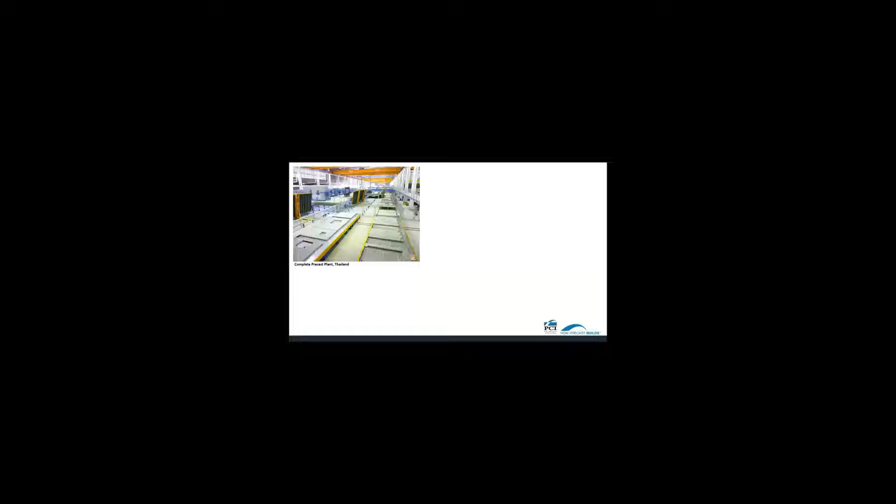Here we see one of our customers, a precast plant in Thailand. They make product for 700 apartments per month and is one of the largest plants in the world. This Hollowcore plant in Belgium is fully automated with very low labor consumption. And here we see a double wall plant in Germany. In addition, we have over 50 plants here in North America.

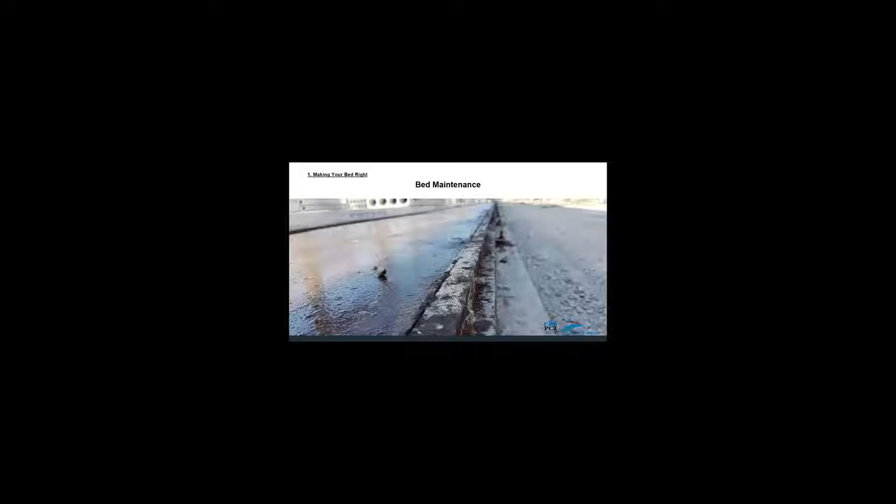As mentioned earlier, bed preparation is a critical step in the production process as it lays the foundation for the rest of the production cycle to continue. But we also need to think not just about the short-term process, but about long-term bed maintenance as well.

Production beds and their components are a valuable asset. Without them, there is no process, and where maintenance lacks, quality suffers, affecting the viability of the production system as a whole. Bed maintenance is therefore a primary consideration to sustaining the production cycle. So where do we start?

Cleaning is the first step, and this can happen immediately after previous production is stripped and loaded out, or sometimes even while it's still going on, depending on the type of product, space available, and scheduling. This can be a fairly labor-intensive operation, as we see here. Crews of 3 to 5 workers, or even more, can be involved on one single bed.

The goal here is to remove all of the remnants of previous production cycle from all of the casting surfaces, including side rails and machine rails. This typically includes fragments of concrete debris, large and small, as well as dust, but may include leftover formwork and other scrap materials as well. Manual scraping, shoveling, sweeping, and vacuuming are standard practice here. It is no secret that this is one of the toughest jobs in the plant.

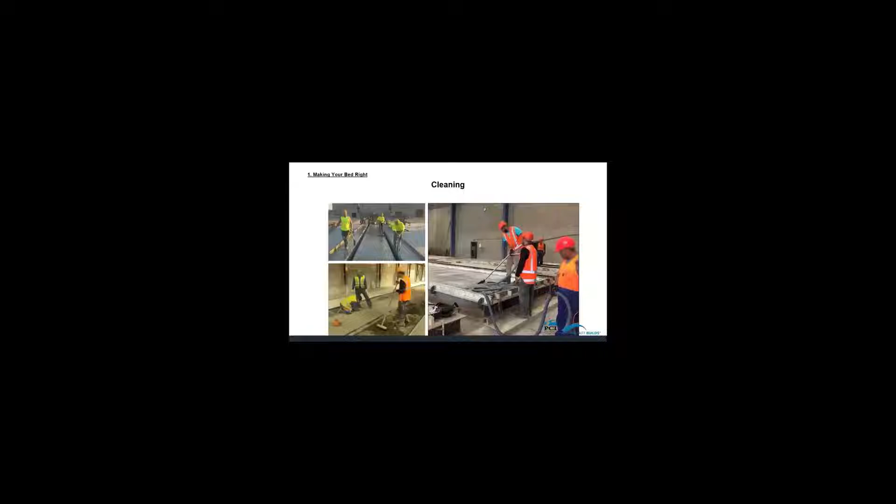Next comes oiling and finally pulling of strand. Once the bed is clean, the crew can begin to apply release agent, commonly referred to as oil, to the surface. This is done using a pressurized spray can or backpack, sometimes followed by floor mops. The key here is to apply a thin, even coat to all casting surfaces.

Too little, and the product may bind in the form, causing damage to the product. Too much, and bug holes and other defects will be visible on the concrete surface. This is a very important job and is usually done by more experienced workers under the watchful eye of the QC manager, of course. The old adage, less is more, certainly applies here.

Pulling the strands then takes place from one abutment to the other. There are a few methods used in the industry depending on the type of product, design of the beds and headers, and whether other reinforcement or headers are in place before strand is pulled.

We won't get into all of the methods, but in general, a team of several workers are usually required to pull the strands off the coils and walk them to the other end of the bed with or without mechanical assistance. This can be quite a tough job with high risk of injury from slipping on the freshly oiled surface.

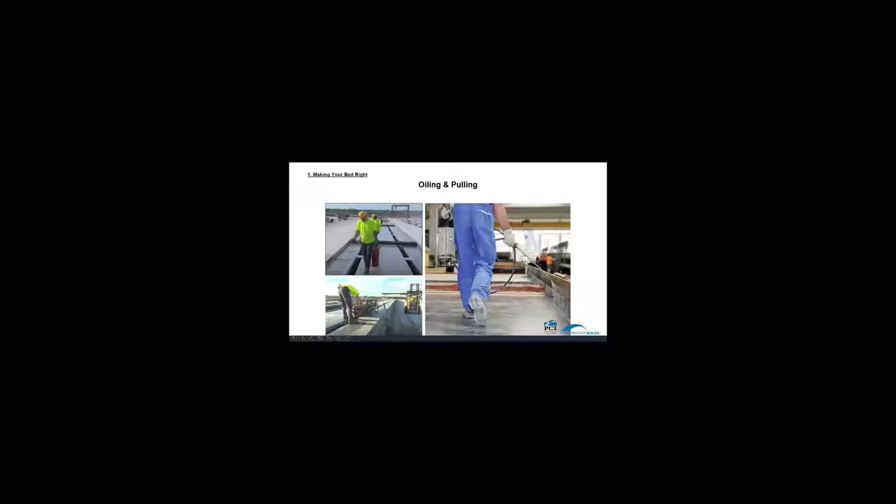I would like to turn your attention for a moment to looking for opportunities for improvement. I am sure that most of you here are familiar with the 8 types of waste commonly affecting production systems, better known as TIM WOODS. They are transportation, inventory, movement, waiting, overproduction, overprocessing, defects, and skills.

In the context of this stage of bed preparation, the most prevalent source of waste are transportation, movement, waiting, defects, and skills. Our intention is not to explain this in detail, but to provide you with the information to recognize where waste can occur. I am sure that every producer can relate to several of these in their plant.

Solving value leaks through eliminating these wastes are the cornerstone of continuous improvement and the key to unlocking the full potential of production efficiency.

When assessing the elements of TIM WOODS, lean methods, efficiencies, and financials, 3 simple areas to also check are cycle time, labor, and rework. You can use the acronym CLR to remember these simple steps.

Cycle time represents the total time from the beginning to the end of a process that includes both process time and delay time waiting to take the next action within the process.

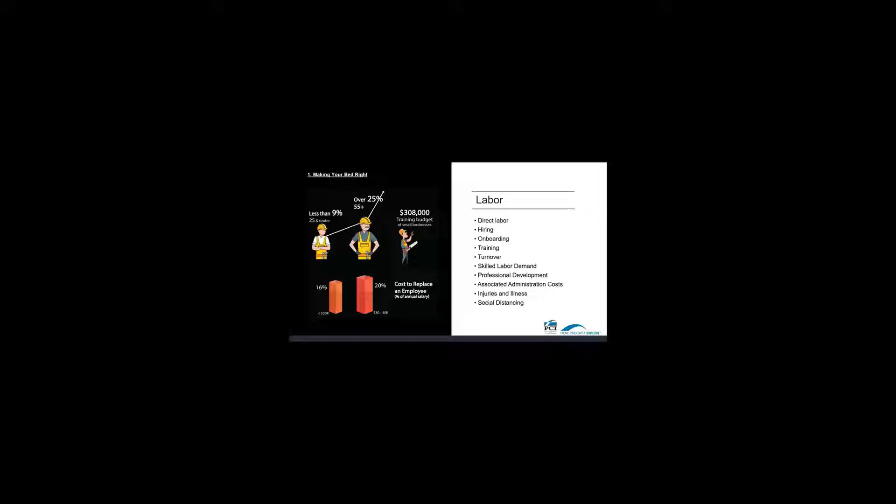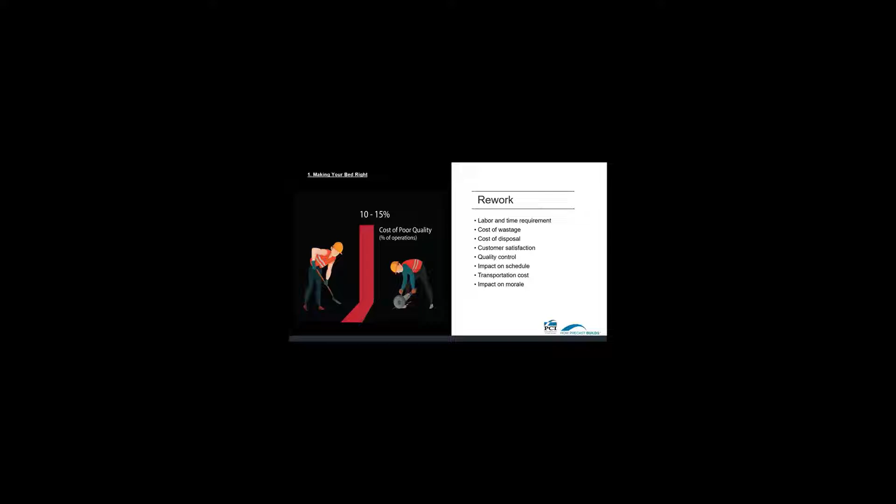There are many cost implications to rework, including labor personnel and labor time requirements, cost of wastage and disposal, customer satisfaction, quality control, impact on schedule, transportation costs, and impact on morale. According to the American Society for Quality, a general rule of thumb is that costs of poor quality in a thriving company will be about 10 to 15% of their operations. Effective quality improvement programs can reduce this substantially, thus making a direct contribution to profits.

And so I hope this was a helpful reminder that we can continue to get excited about finding opportunities for improvements in operation.

So now I will hand this over to Jason to present the next part of the webinar, beginning with current industry standards.

Thank you, Judy. So in the industry, the bed preparation process typically follows the process that we see here on the screen. It's a three-step process: cleaning, oiling, and pulling strand. In the non-mechanized plants where manual processes are used, the methods will look just like what Judy described a few moments ago. All of these steps require a labor component with at least a basic to intermediate skill level. These steps are critical and need to be executed quickly and on time for successful handover to production crews, regardless of the type of product.

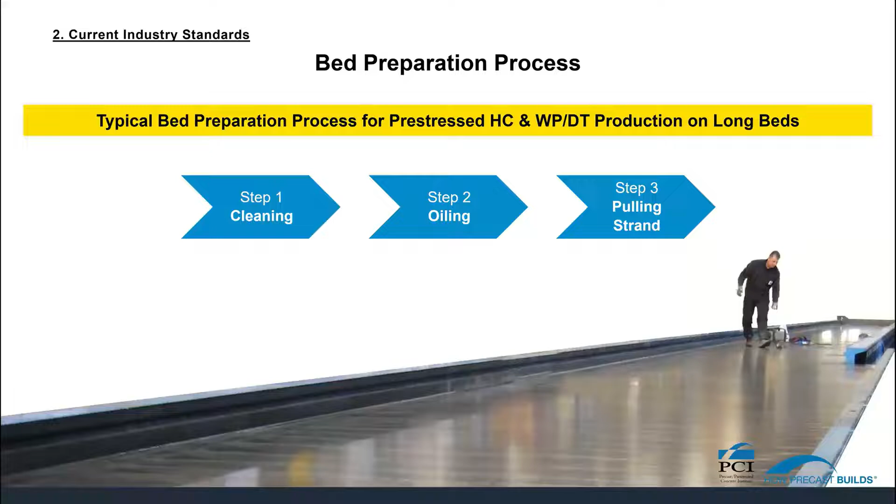This tends to be higher in the wet cast production, such as wall panel and double T, than in dry cast Hollowcore. This is because of the casting method and the fact that overfilling of the forms tends to produce more cleaning activity as a result. This might seem like a small amount at first, but this can add up to over $100,000 annually. And this is just for 1 million square feet, so it will scale up with higher production volumes.

I would invite at this time all producers who are tuned in to take note of these numbers to see how your production measures up. If you're out of this range on the higher side, it might be time to look at improvements to your process. If you're under, congratulations, you're doing something right.

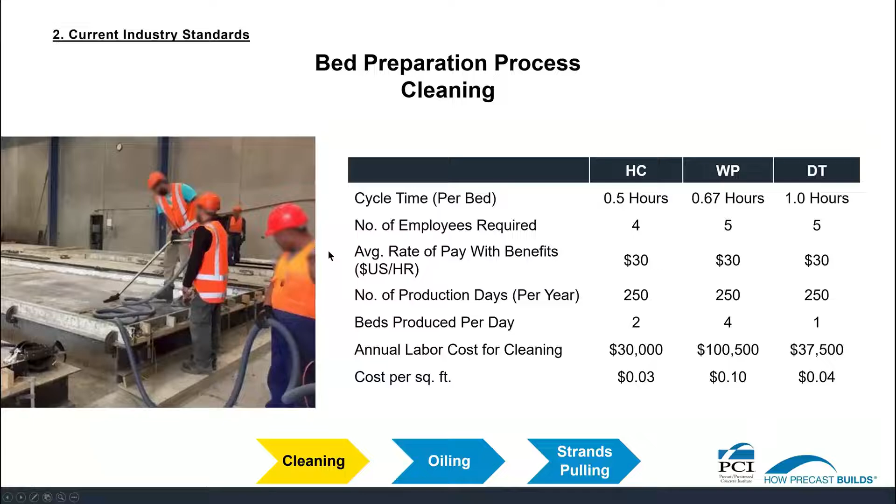Moving on, let's look at oiling in the same way. Oiling crew sizes are typically smaller with between 2 and 3 workers. Remember, these are the more experienced guys, and typically for wall panel, they'll have 1 person with a mop to make sure that it is applied evenly. For double T's, you'll have to oil the deck in 3 places and the stems as well, so there's a lot of surface area to cover there. For hollow core, there are typically 1 to 2 workers, 1 with a spray can and the other with a squeegee.

For oiling, you'll expect to pay somewhere between 1 cent and 5 cents per square foot produced. This equates to roughly between 10,000 and 45,000 per 1 million square feet, depending on what you're producing. So you can see how this is starting to add up.

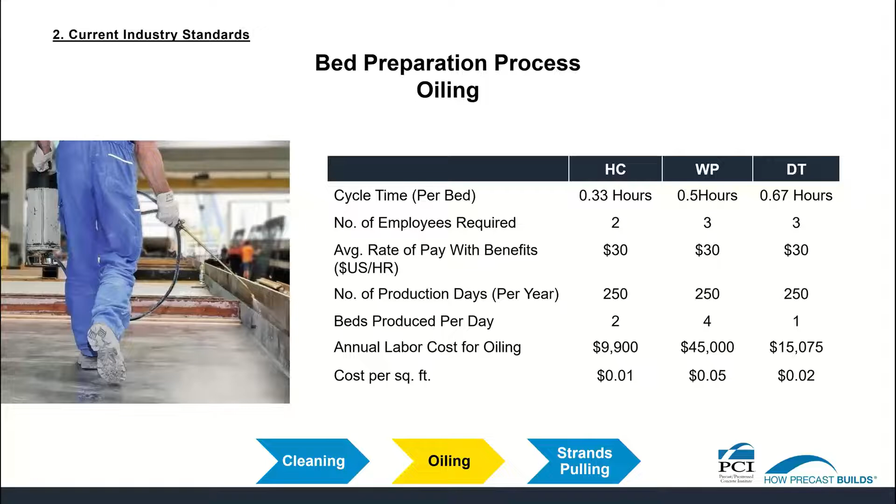And finally, we're pulling strand, and this is where we see a lot of variability between the processes in the field, because some producers use mechanical assistance like what you see here in the photo on this double T bed. But for manual strand pulling, the numbers look like what you see here on the slide, where producers can spend between 2 to 3 cents to as much as 8 cents per square foot for pulling strand.

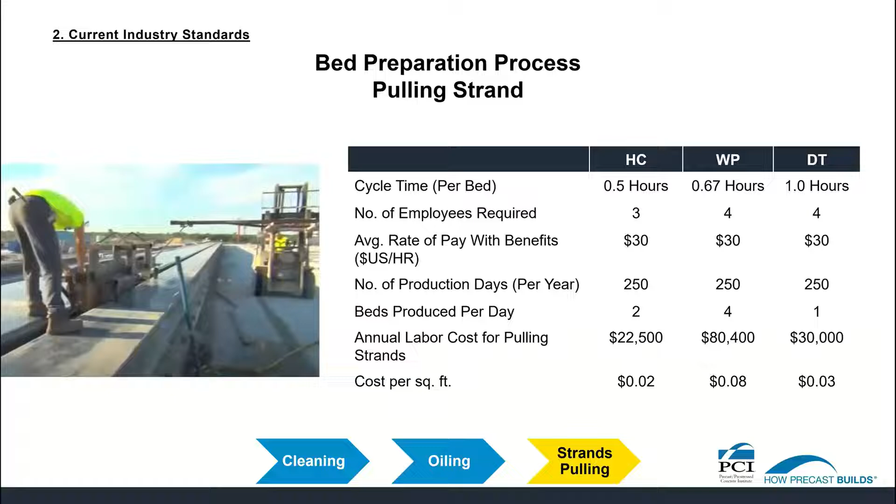So a summary of the complete preparation cycle for manual processes for all 3 product types. You can see it here summarized in this table. For hollow core, complete cycle, which includes cleaning, oiling, and pulling strand, we expect to see about just over 1.25 hours per bed. Wall panel is just under 2 hours per bed, and double T can be as much as 2.5 to 3 hours.

The annual cost of labor for cleaning is about $30,000 for hollow core, $100,000 for wall panel, and about $37,000 for double T. For oiling, it's just under $10,000 for hollow core. For wall panel, it's about $45,000, and for double T, it's about $15,000. And finally, for pulling strand, for hollow core, it's approximately $22,000, wall panel $80,000, and double T about $30,000.

So all of these add up to approximately $62,000 for hollow core, $225,000 for wall panel, and $82,000 for double T, for a total cost per square foot of 6 cents for hollow core, 23 cents for wall panel, and 8 cents for double T. This is again per 1 million square feet produced.

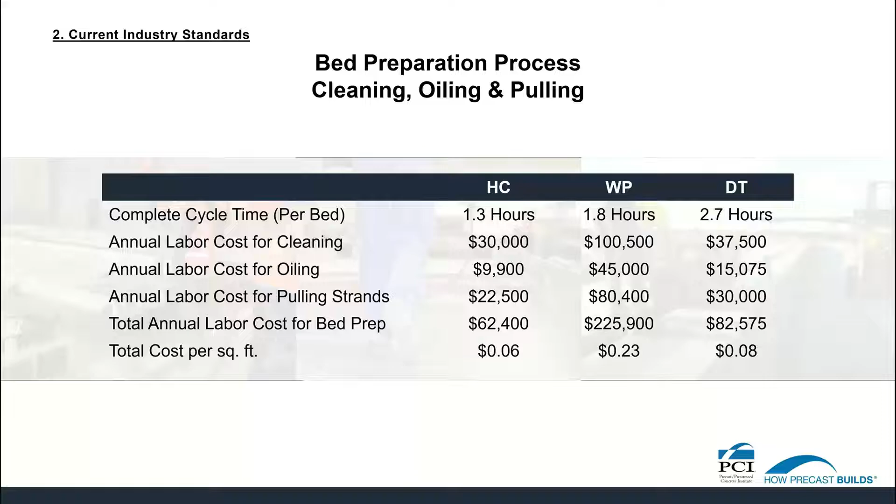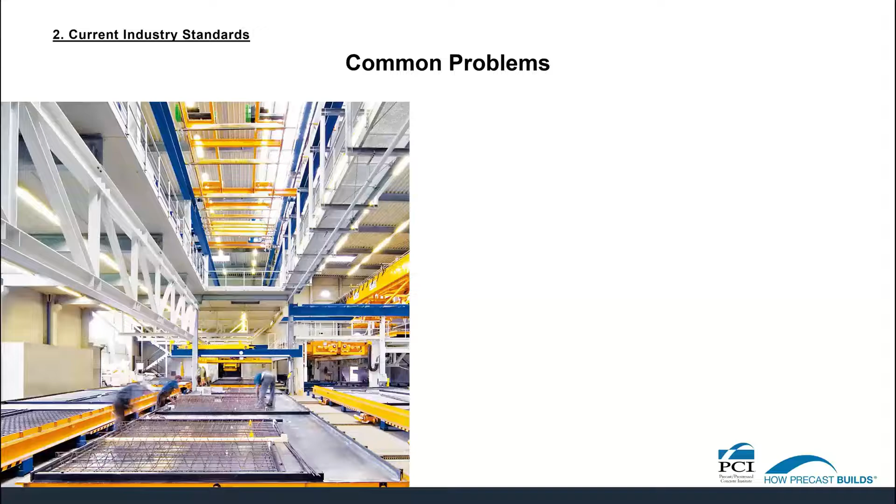So other than the quantifiable view of the production preparation, what are some of the common problems that we see? The common problems that we see start with the delays affecting the cycle time, which is the length that the production takes in total. This can lead to excessive overtime, and then also a lack of consistency in cleaning and oiling.

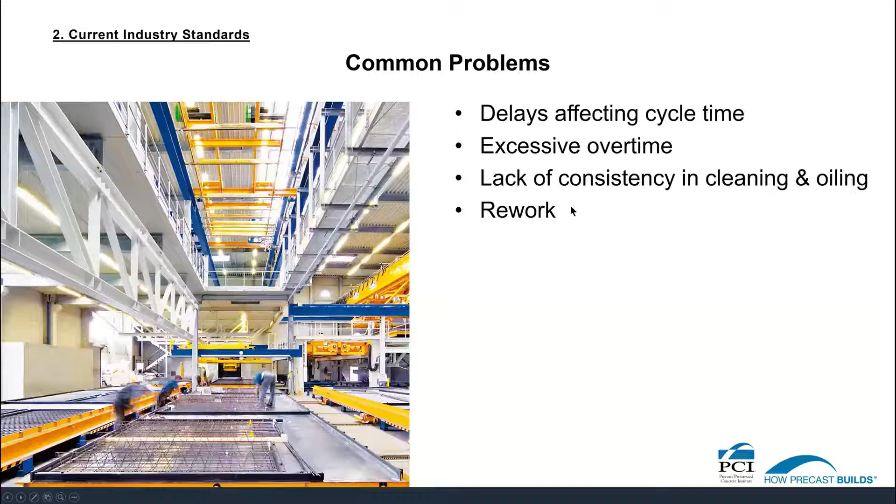This also leads to rework in the final product, and also a high worker turnover and absenteeism. And at worst, you can also see issues with injuries and lost time claims as well. So these are some of the intangibles and unquantifiable issues with bed preparation.

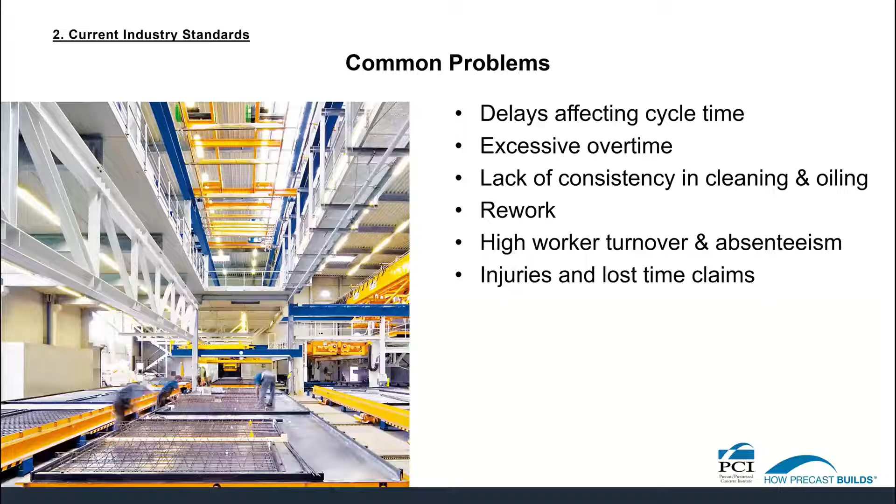So on to optimization solutions. With the advance of precast automation technology for long bed systems, producers can integrate equipment into their operations to assist with cleaning, oiling, and pulling strand. These machines will typically run on rails beside the bed or on the forms themselves, and can be transferred from line to line so that the investment can be utilized throughout the complete production system.

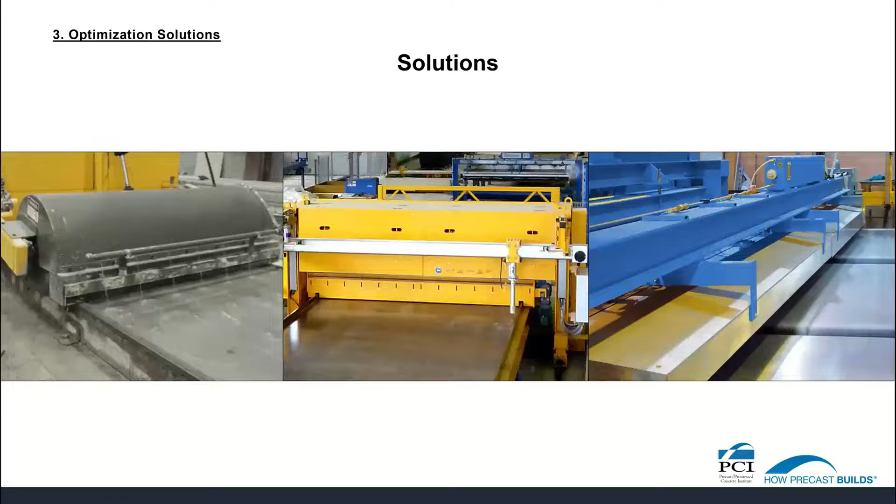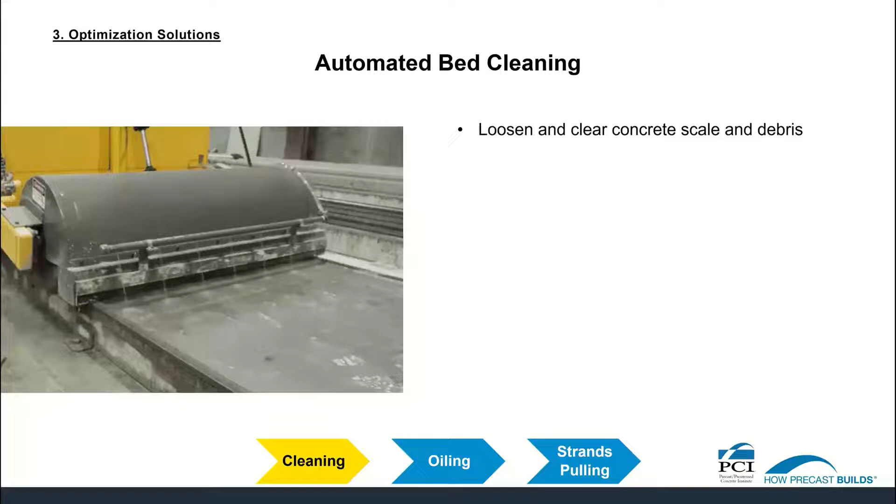So let's take a look at automated bed cleaning solutions, which can take care of the heavy lifting, scraping, sweeping, and vacuuming that Judy was talking about. These types of machines are able to loosen and clear the concrete scale and debris, clean the fixed side shutters on the production bed. Dust collection systems, which are compliant with OSHA silica standards, are also available on these machines.

Cleaning the form surface using scrapers and horizontal brushes. The main brushes can also be lifted to avoid obstructions on the bed, which is important for wall panel production where we have bulkheads that we need to clear.

We can accommodate different types of bed surfaces through the use of different types of bristles, such as Teflon or steel, depending on what's required. And we can also have pivoting side brushes for side shutter cleaning. And in the case of double T, we also need to take care of the stem cleaning, and this is done through the use of stem brushes on these types of machines.

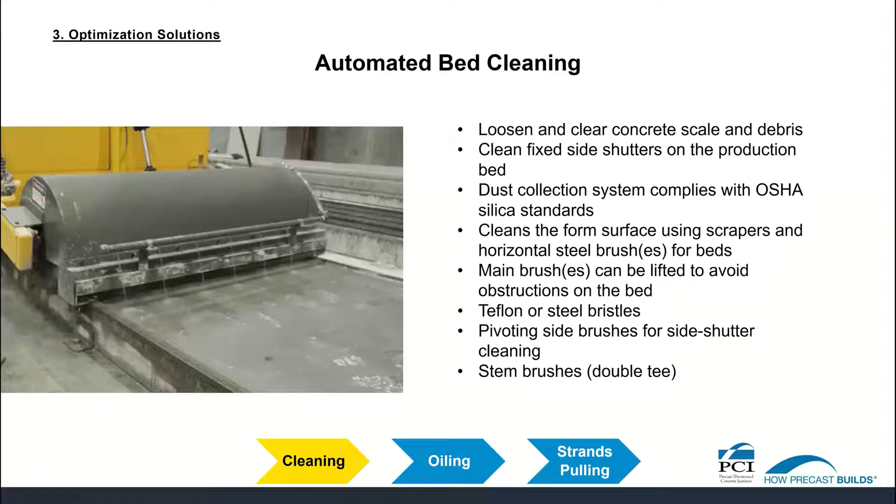Let's take a look at what the impact of these types of machines would be. In this case, for hollow core, wall panel, and double T, we can see a drastic reduction in cycle time per bed for each type of product. We will show a summary slide at the end of this so that we can see everything compared together to the manual processes. But right off the bat, we can see shorter cycle times and a lower number of employees required to conduct the bed cleaning operation.

We can also see lower costs in total for cleaning, obviously, with about $5,000 per year for hollow core, just under $10,000 for wall panel, and just under $4,000 for double T. Again, this is on the basis of a million square feet of production. This equates to a cost per square foot of approximately half of a cent for hollow core, 1 cent for wall panel, and 4/10 of a cent for double T. It's quite a difference.

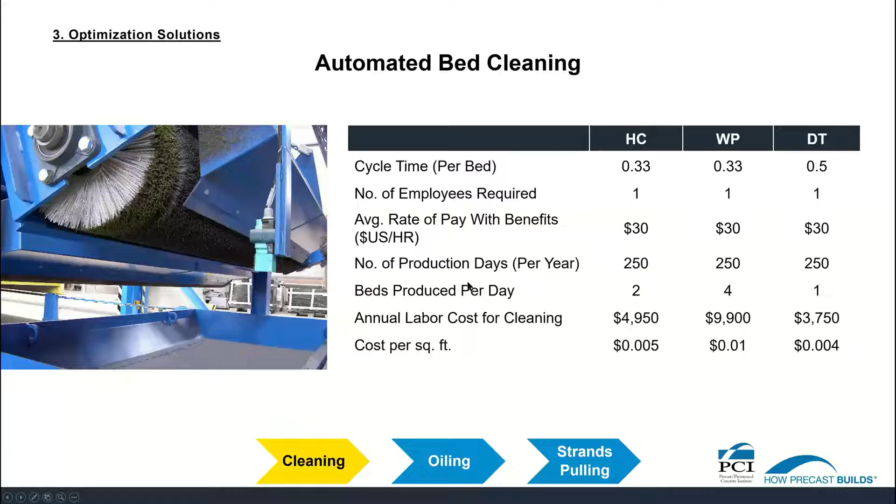Then on to automated oiling. Along with automated cleaning, bringing in an automated oiling machine can have expanded benefits to production as follows.

We can have optimized oil application across the bed surface, PLC-controlled pressure systems which allow control over the nozzle system and application of oil, customizable oil temperature control ensuring consistent results across a wide temperature range, sectional oiling ensuring effective application of oil over the bed surface so you don't overuse oil where you don't need it, and customized application to achieve optimal results with a wide range of oils, ranging from mineral oils, synthetics, as well as water-based oils.

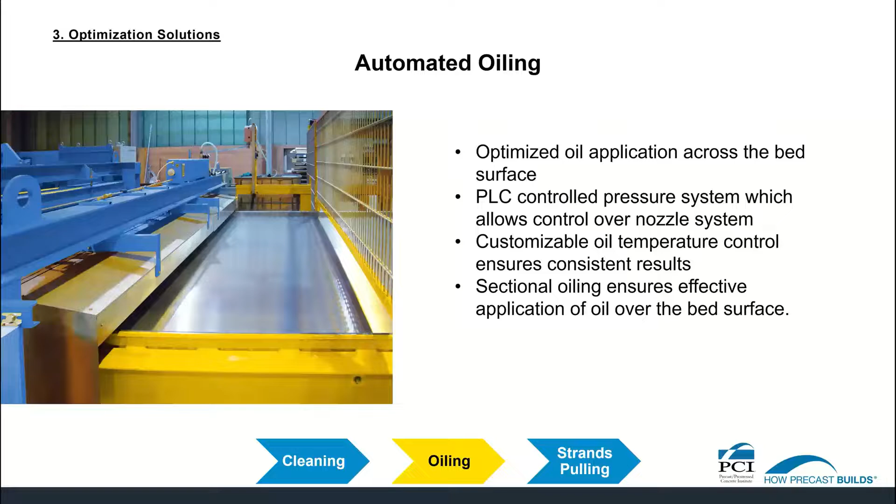So the impact of bringing in an automated oiling system are seen here. Just like in the slide before, we can see a reduction in cycle time per bed for each type of product, and a reduction in the number of employees required, because there's only a single employee required to run this type of machine, resulting in a large reduction in annual labor costs for oiling.

So for hollow core, we're looking at about $1,500, $4,800 for a wall panel, and approximately $1,200 for double T. The cost per square foot to produce 1 million square feet is down to about 0.2 cents for hollow core, 0.5 for wall panel, and 1/10 for double T.

You can see that these are extremely low, but in some cases they're actually inflated and could effectively be zero if the oiling is done while cleaning is happening, which is possible with these types of machines. If not, it's done during a return run and the costs are tracked as you see here. So it could be less or it could be as you see on the slide.

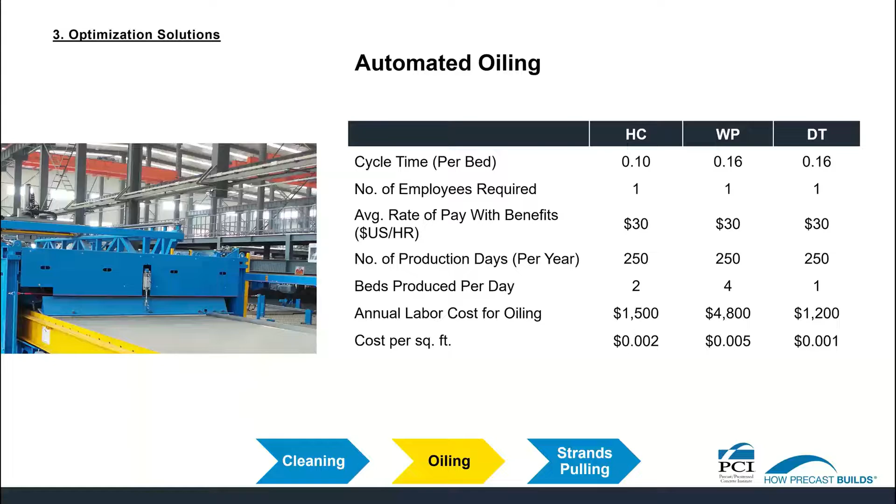And finally, with an automated strand pulling machine, producers can pull multiple strands simultaneously rather than running up and down the bed with multiple workers. You can also have quick release locking mechanisms on the strand towing equipment so that you can thread the strand through the bulkheads while you're pulling.

You can also have adjustable torque settings so that when you're pulling out of the strand cages, you can prevent snagging or hang-ups when pulling out the strand from the strand packs, which is a huge benefit when you're pulling multiple strands all at once.

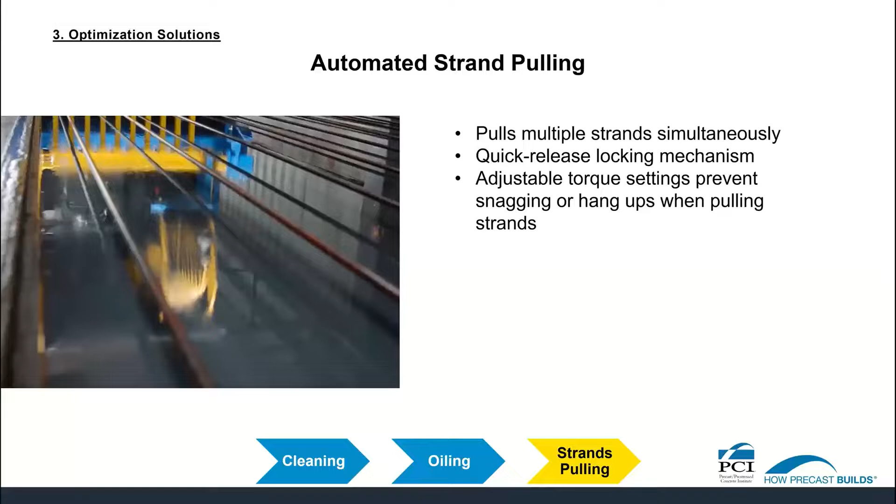The cost per square foot equates to about 1 cent for hollow core, 2 cents for wall panel, and again 1 cent for double T per million square feet produced.

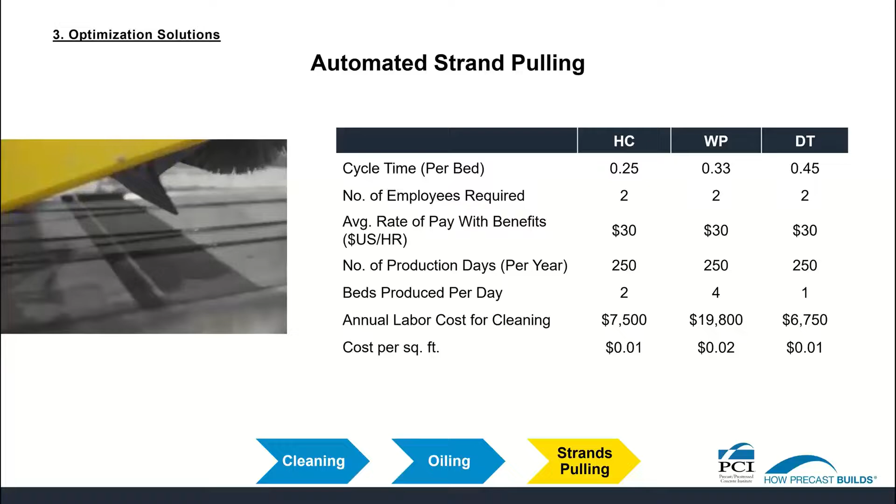So if you look at the automation results all summed up together, the complete cycle time per bed is about 0.7 hours for hollow core, 0.8 hours for wall panel, and just over an hour for double T.

The total annual labor cost for cleaning for hollow core is about $5,000. For wall panel, it's just under $10,000. For double T, it's just under $4,000.

For oiling, again, $1,500, $4,800 for wall panel, $1,200 for double T, $7,500 for hollow core. For pulling strand, wall panel is about $20,000, and double T is about $6,700. So the total annual cost for bed preparation, summing this all up, is just under $14,000 for hollow core,

approximately $35,000 for wall panel, and about $11,700 for double T.

So all of this equates to about 1 cent for hollow core, 3 cents for wall panel, and about 1 cent for double T per square foot per million square feet produced.

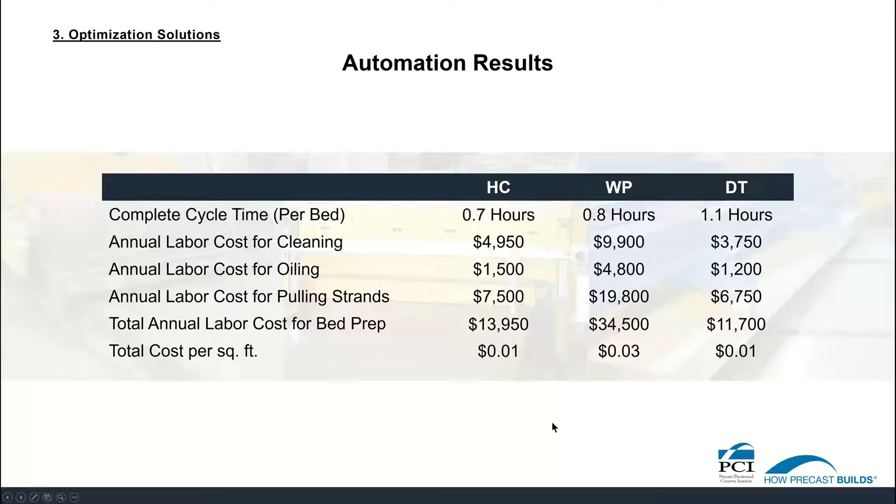So let's look at the savings. We summarized the costs for the manual process, and we've also summarized the costs for automated processes. So here we can see the comparison.

So here we have hollow core — we are saving about 0.6 hours in cycle time per bed. For wall panel, it's approximately 1 hour. And for double T, we're saving about 1.6 hours.

That's a huge difference if you look at the overall production day. That's the difference between having a regular day and having a significantly overtime dominant day.

Also, in terms of dollar value, we've saved in terms of hollow core just under $50,000 per year. For wall panel, about $190,000 per year, and double T we've saved about $70,000 per year, again for 1 million square feet produced.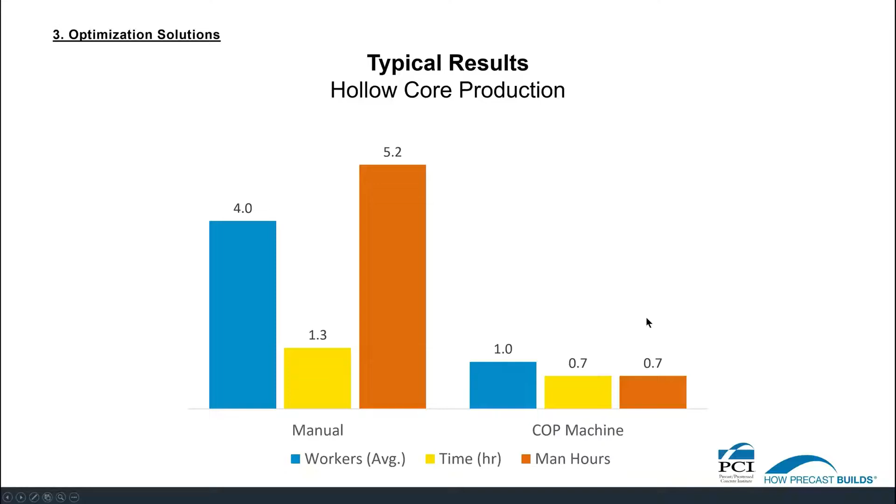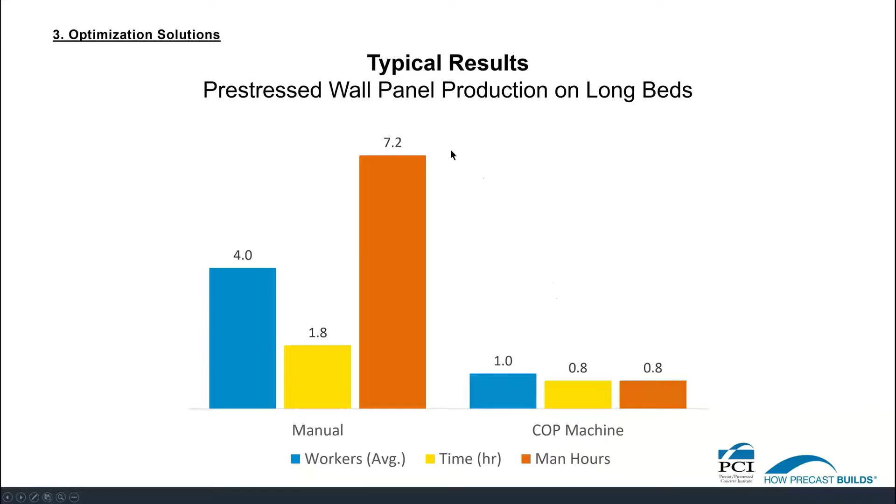Similarly, for wall panel, we see the manual process on the left with approximately 4 workers engaged, a total time of 1.8 hours, and 7.2 hours of total labor used. In the automated process, we've barely used 1 hour in terms of man-hours. There's a huge difference between the manual and automated processes.

And again here for double T, approximately 10.8 man-hours used in the manual process and just over 1 hour used in the automated process. Quite impactful information.

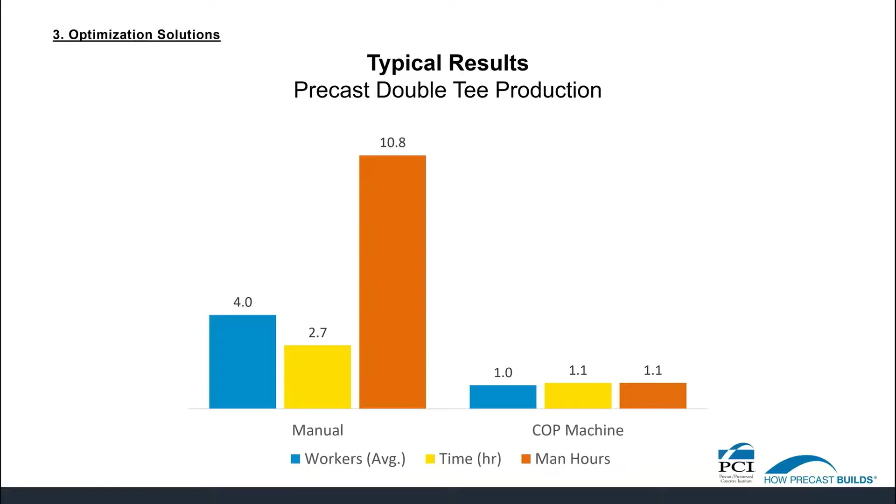So finally, in summary, I think we've demonstrated that manual bed preparation can be quite tedious and labor intensive depending on the type of product and process being used, and it's certainly prone to errors and labor quality issues. By introducing automated bed preparation, we can reduce the cycle time and labor components for cleaning, oiling, and pulling strand quite significantly. This will improve quality and reduce rework for the producer, resulting in better plant safety, higher profitability, competitive advantage, and customer satisfaction.

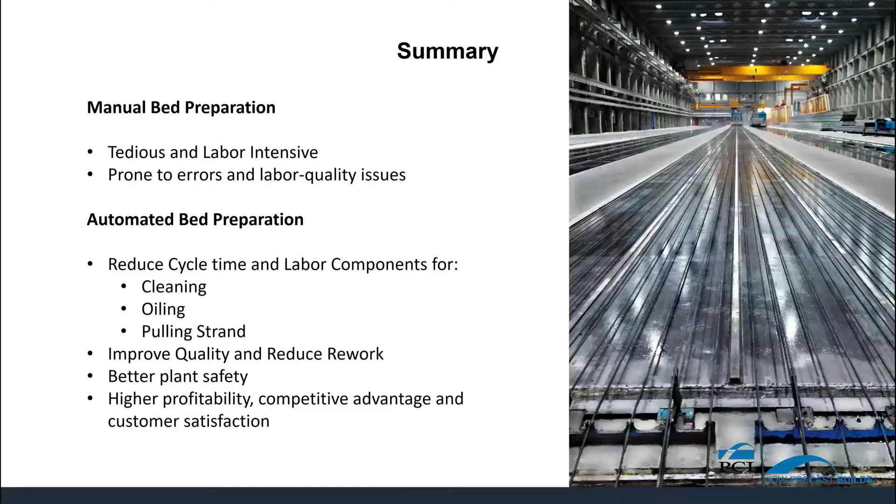With that, this concludes our presentation, and I turn it over to PCI.